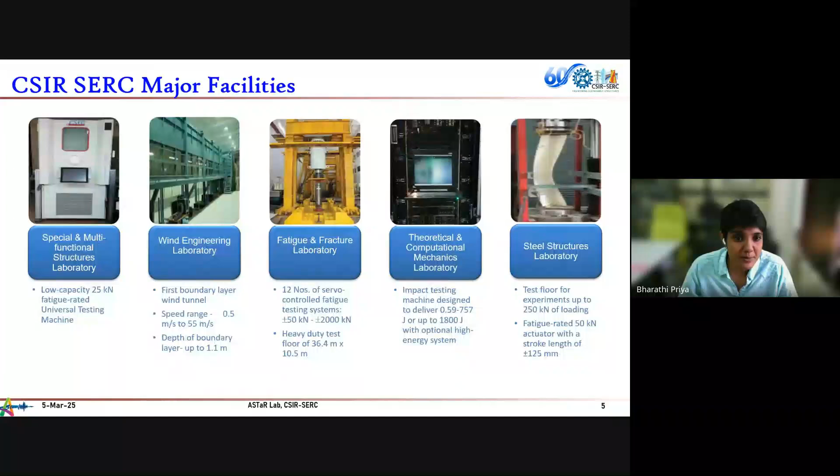We have 10 laboratories with us, including the one where I'm working, the Advanced Seismic Testing and Research Lab. This is a brief about our institute, which I'm sure many of you are aware of, and this is our laboratory, the Advanced Seismic Testing and Research Lab.

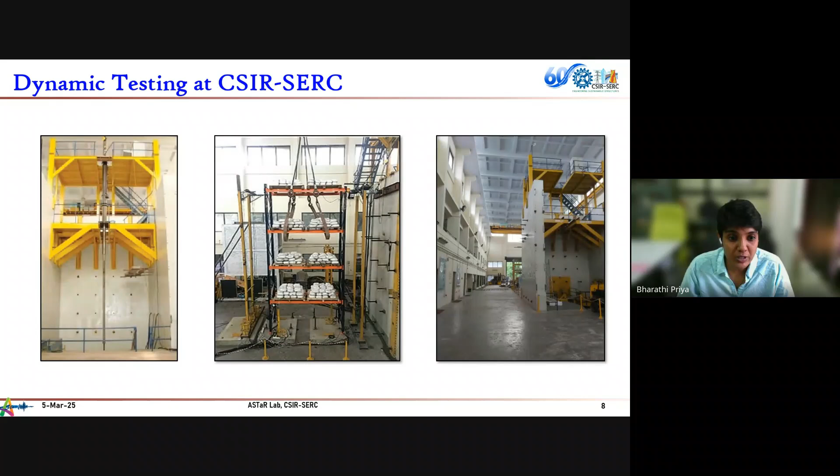We have sophisticated state-of-the-art testing systems, mainly consisting of shake tables and a pseudodynamic testing system. I believe Dr. Mohit, who gave a lecture yesterday, would have given a brief about all these things, so I'm skipping most of this part. Most of the dynamic testing we do consists of full-scale testing, and some unique structures, not necessarily buildings, which Dr. Mohit touched upon. So let us dive into the topic, which is vibrations, specifically seismic vibrations.

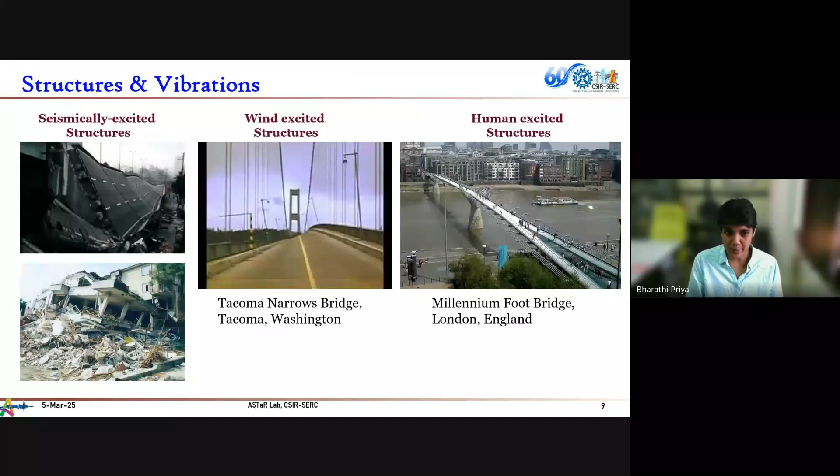The picture tells a lot about what happens to structures when subjected to vibration. There are seismically excited structures due to which the structure collapses, and there are also classical examples of wind-excited structures, which causes some sort of disturbance to the structure.

There's also a very interesting case study, the Millennium Footbridge in London. When it was opened, lakhs of people walked onto it, and the vibrations from people walking caused the bridge to vibrate. This was not anticipated during design. This is one of the very peculiar cases of what happens to buildings when subjected to vibration.

So the vibration could be anything - wind, earthquake, or something bizarre like human-excited structures. But our main goal as structural engineers is to ensure that whatever be the vibration source, the structure remains safe. Nothing should happen to the structure; it has to withstand whatever excess vibration it suffers, more than the anticipated one.

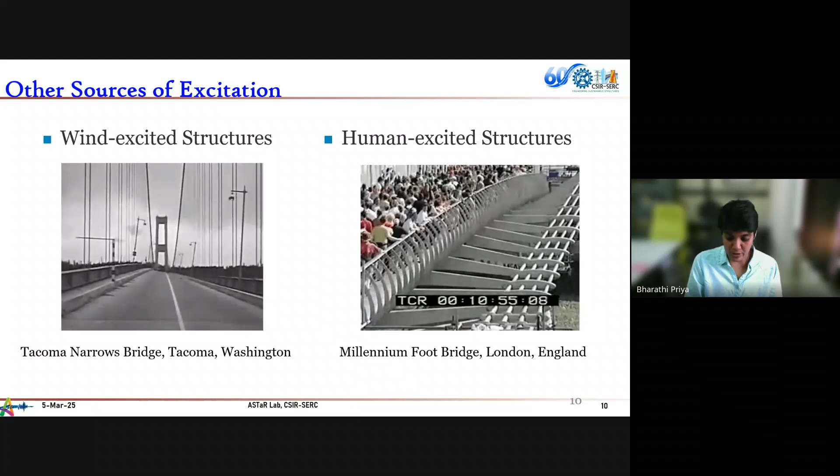That is the philosophy we expect for designing structures for earthquakes also. So what happens during an earthquake? One important distinction is there is ground acceleration acting onto the structure. The ground is moving, and because of that there are forces acting onto the structure. Why? We go back to basics, which is Newton's second law - a building is nothing but a mass, and when it's subjected to acceleration, it results in some sort of force. But it is not that simple.

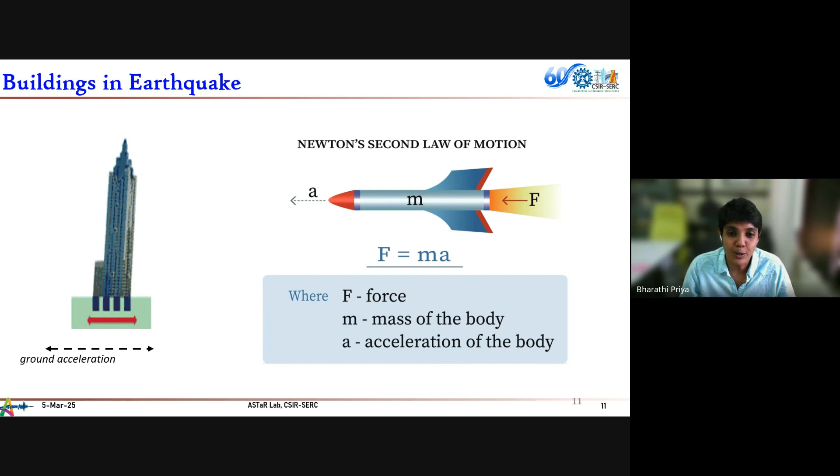But these forces happen. What happens to structures? We know that they collapse. That is one of the primary causes for concern for buildings. So we see collapsed buildings, roads, bridges, whatever be the structure, and it in turn kills people.

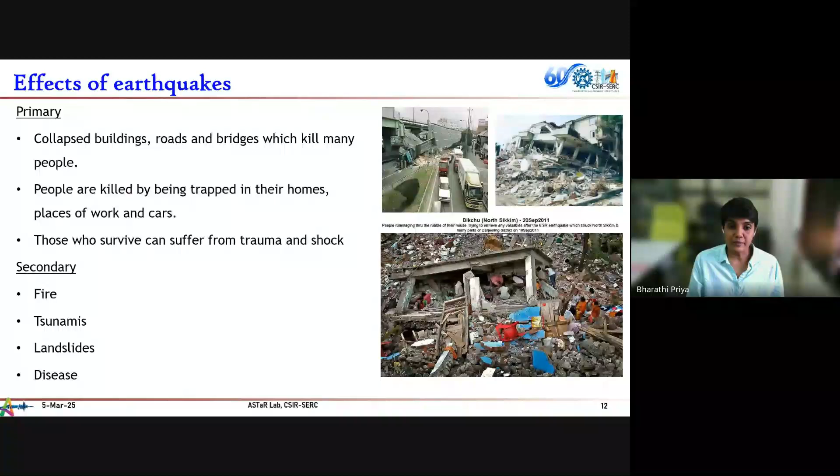There is a famous saying among seismic engineers that it's not the earthquake that kills people, it's actually the buildings that fall on people that kill them. So that is one of the primary effects of earthquake. But now as structural engineers, we are not looking only at the primary effect. We expand our area of interest to see what are the secondary effects and the long-term effects that can cause devastation after an earthquake. So this also falls on us.

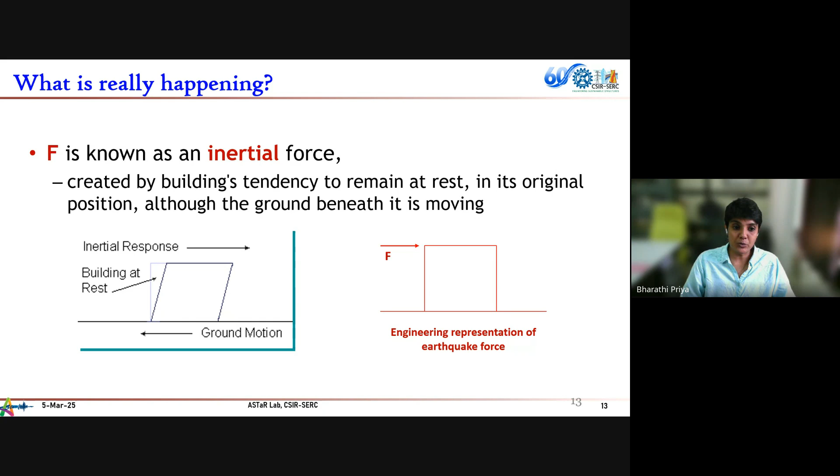As I said, there is an inertial force acting, and when a building is at rest, it is subjected to acceleration, which is a lateral force coming onto the structure. For engineering representation, we take it as a lateral force acting onto the structure. This is a simplified example of a single frame subjected to ground motion, and how the force will be represented when designing the structure.

But why does the structure move? Again, we go back to the basics, and most of the reason it fails or moves is because of resonance. All of us know what resonance is, and when the resonance of the ground motion matches with the resonance of the building or some parts of the building, there is going to be an amplified response, and because of that, the building is going to fail. So this is the basis behind it.

There is a very famous example of this, the Mexico City earthquake, which happened in 1985. What happened there is most of the shorter structures sustained the earthquake, and most of the taller structures failed. This was a beautiful example of how resonance affects seismic excitation.

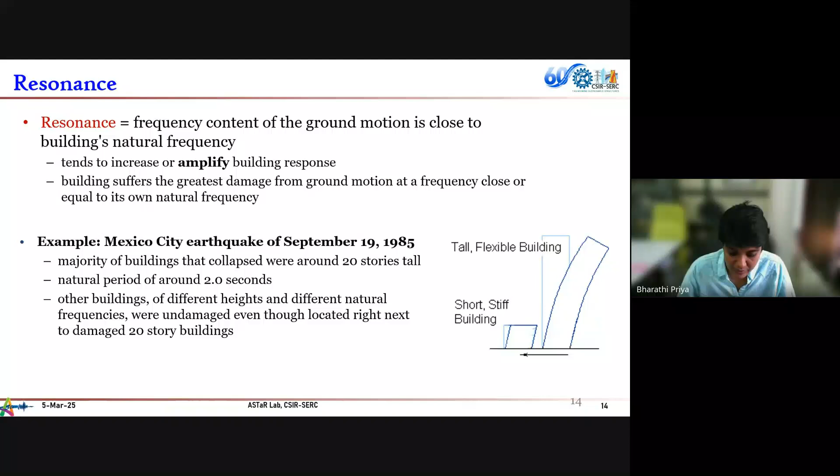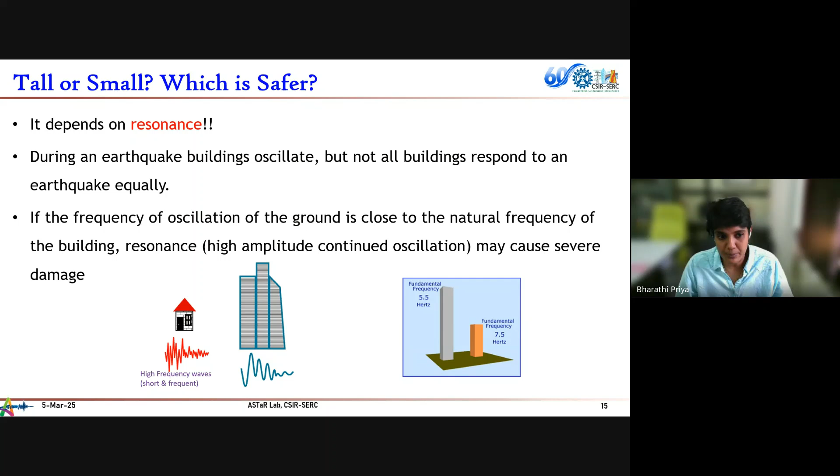The Mexico City earthquake was famous for being a low frequency earthquake, and because of that, most buildings around 20 stories tall, having a natural period of around 2 seconds, failed. Other buildings of different heights remained undamaged. So as I said, resonance plays a major role in it. If you see typical examples of how tall a building is and how much resonance affects each building, the taller it gets, the more flexible it becomes. That is the idea behind it.

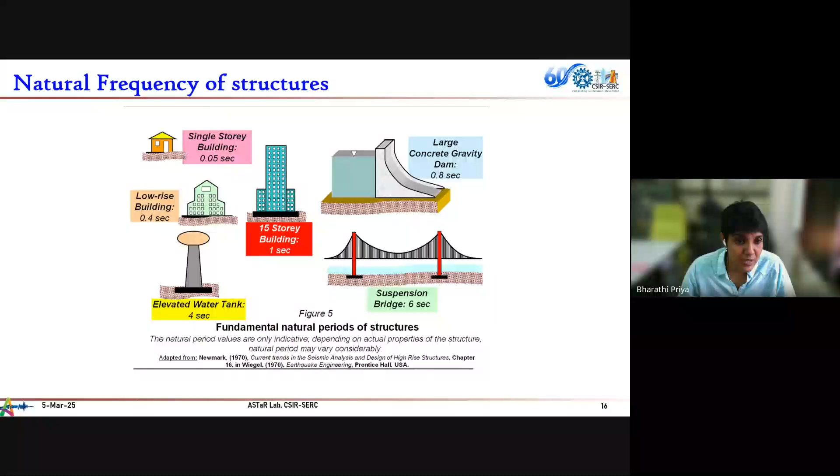So it's not just buildings anymore. We have to look at different kinds of structures. As structural engineers, we have to deal with different kinds of structures against earthquake, like suspension bridges, elevated water tanks, dams, each having different natural frequency, different time period, and they behave differently for the same earthquake or for different earthquakes.

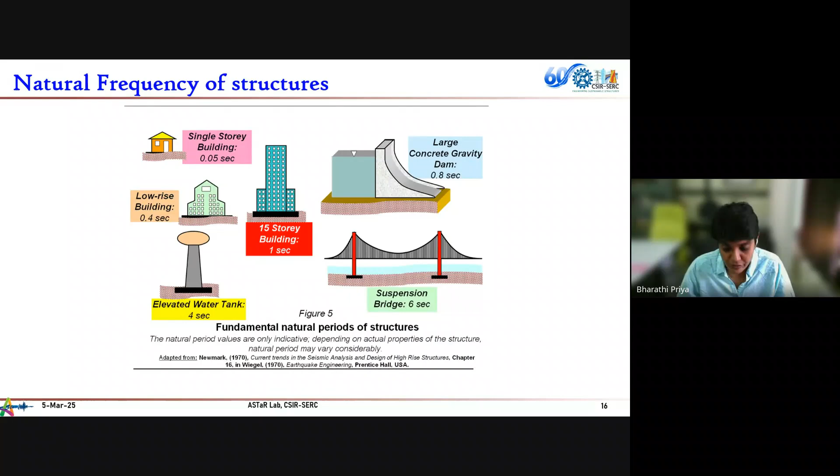Now let us see how we are classifying earthquakes for design consideration. We know that we take the design basis earthquake, which is reasonably expected to occur in the lifespan of the structure. Then there is a maximum considered earthquake, which is the most severe earthquake. What we expect is for the structure to behave in a ductile manner so that it doesn't experience a brittle collapse or a sudden collapse for whatever earthquake may come.

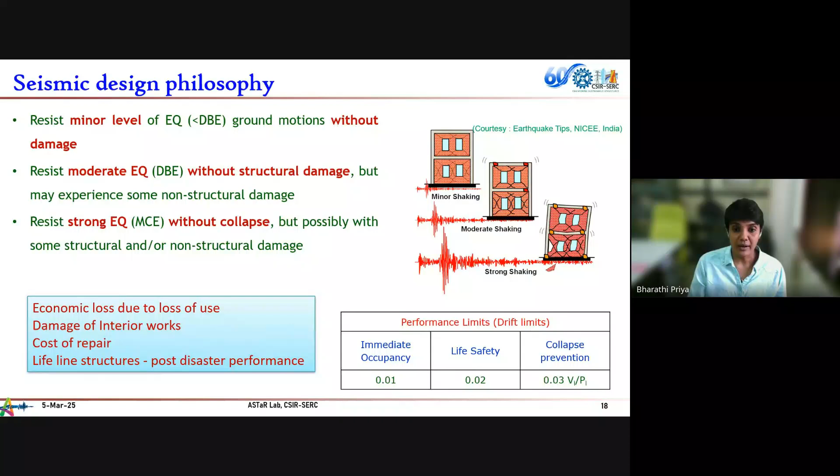That is the performance expected for the structure. For any normal residential structure, it has to withstand minor shaking without any damage. For moderate shaking, it should not have any structural damage, only repairable damage. And to resist a strong earthquake, it should not collapse. There can be some damages and some non-structural damages, but it should not collapse. So this is the performance that we expect out of a building for the different earthquakes I was talking about.

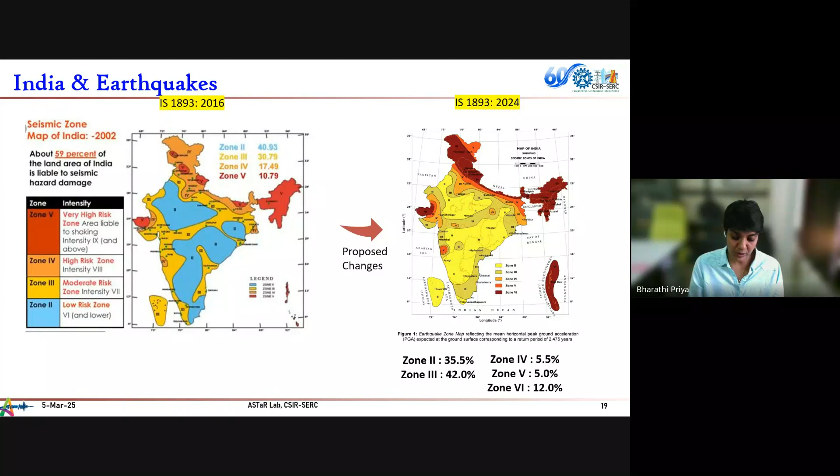Most of the structures which are already designed might not cater to the criteria that we are revising right now. Let us see some of the most common used seismic analysis methods.

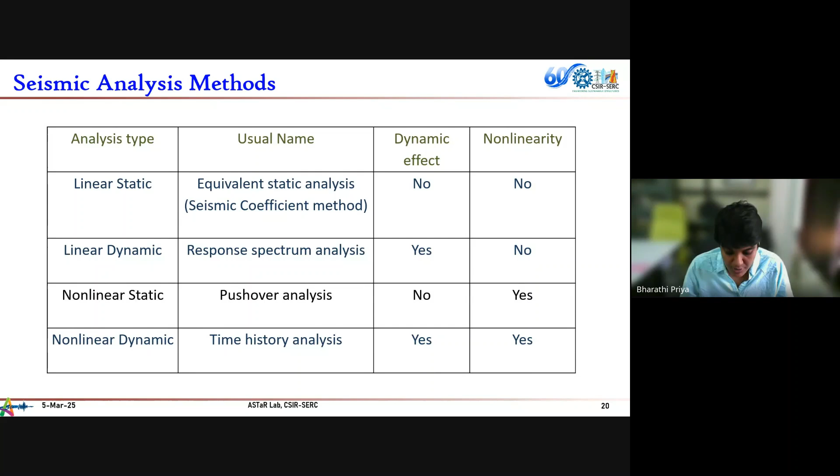There is linear static, linear dynamic, non-linear static, and non-linear dynamic. Most of the time we revolve around linear dynamic, where you take the dynamic effect of the structure but don't consider the non-linearity that much. But structural control techniques primarily revolve around the non-linear dynamic method, mostly consisting of time history analysis, where you take the dynamic effect of the structure as well as its non-linearity and the devices added to it into consideration. This is the most sophisticated design method we can enter into.

But why do we need these sophisticated design methods? We are talking about structures with increased flexibility. We want taller, more sleek structures. We want a higher safety level for the structure, and we also want to reduce building utilization materials, moving towards sustainable materials.

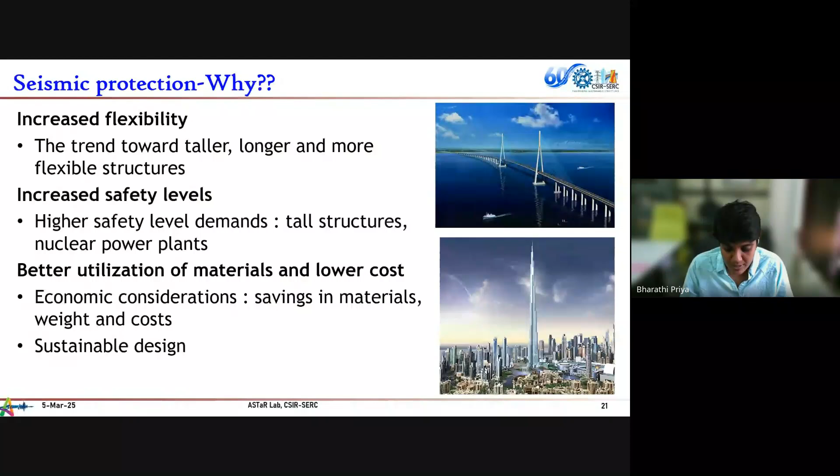So we have an open question: can we make a structure really earthquake proof? Whatever it is, DBE or MCE, can the structure withstand that? Theoretically, to make a structure earthquake proof, it has to be smart, with different control techniques for different kinds of earthquake vibration. All these things should be there in a single structure to make it earthquake proof.

It has to resist fire, and because of the post-earthquake scenario I was talking about, all these things should be in place for a structure to be called earthquake-proof. That is why, in reality, it is very difficult or nearly impossible to build something earthquake-proof. But we can make it earthquake-resistant to some extent. There is a major difference between the two.

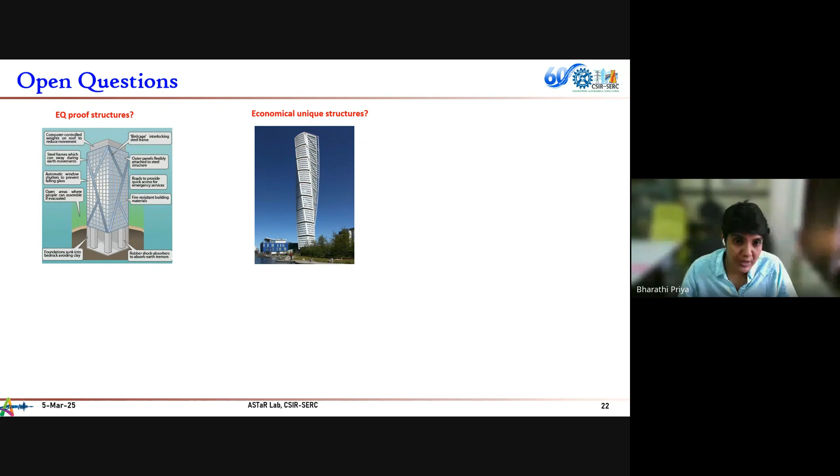We also want a unique structure that has to be economical. And since we're talking about seismic forces, we cannot turn a blind eye to other forces coming onto the structure. Take blast, for example, which is also a dynamic load—you see the difference in structural behavior, in the loading behavior, between blast loading and earthquake time history. These are two contrary requirements we are putting onto the same structure: it has to withstand both blast and earthquake.

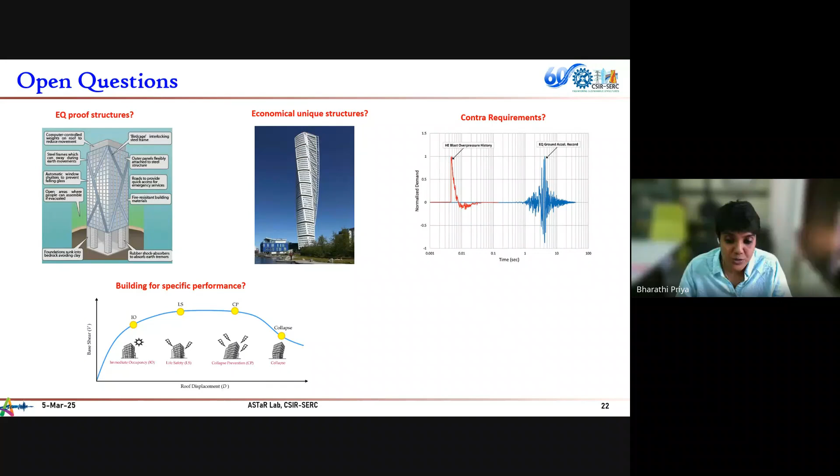Now we are looking into a specific performance level for a structure. The performance tells you whether your structure needs a life safety design, a collapse prevention design, or an immediate occupancy design—how stringent it has to be depending on the type of structure.

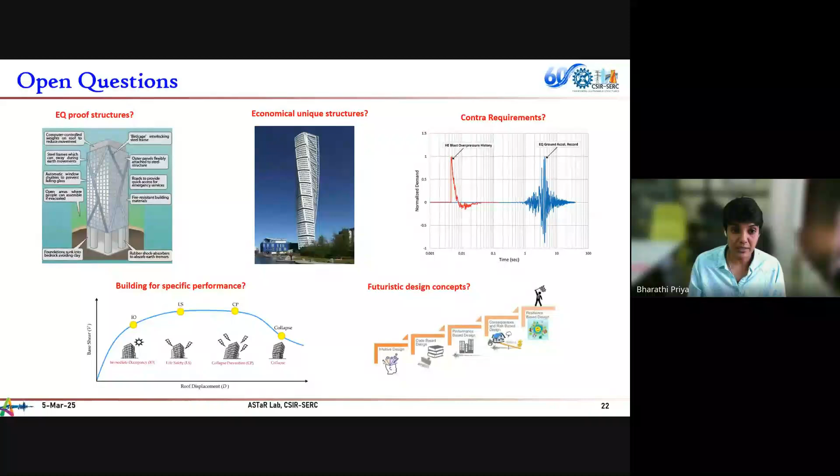We are moving into the resilience-based design concept, where it's not just about the structure anymore—it's about the whole community level, how it performs and how it bounces back after a natural disaster like an earthquake. When we talk about resilience-based design in a seismic scenario, it includes technical, organizational, economic, and social aspects.

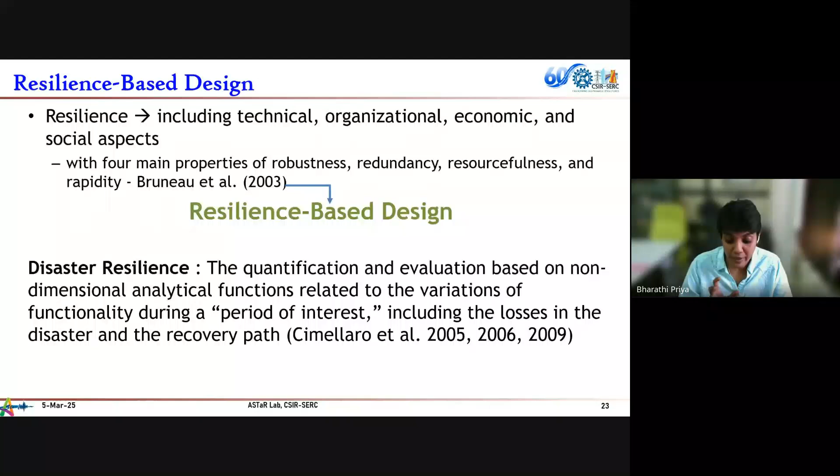What are the primary effects? What are the secondary effects? How do we quantify it, and what measures do we use to quantify resilience-based design? And if we're talking about disaster resilience, what should be the period of interest—how much recovery time should be allowed for the structure? All these things come into play.

So whatever parameters we talked about earlier get modified for the resilience performance level—from a 2D concept, it becomes 3D. We want functionality, recovery time, and intensity measures it has to withstand. We divide the performance level based on this: starting from safe and operational, to safe but repairable, to safe but usable. These multi-criteria come into picture when designing for resilience.

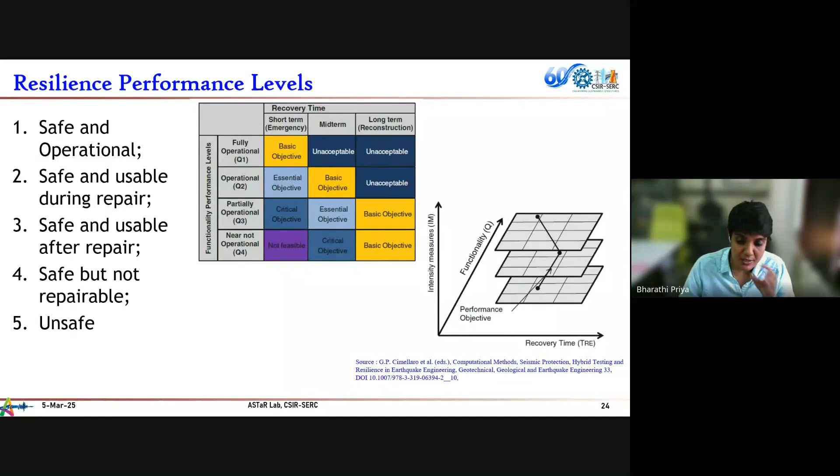If these stringent requirements come into play, can we rely on traditional methods to satisfy all these needs? This is the question a seismic engineer faces. Traditional-based design, which is basically strength or ductility based, may be possible most of the time, but it's highly uneconomical for these stringent requirements. That's when we go for response control based methods, where basically we are looking for two or three functionalities.

You either minimize the structural damage and control the response, or modify the interaction between the structure and ground during an earthquake, isolate it in some other way, push the natural frequencies away using some method, and make it efficient. All these can be done by adding a stiffness based device, a damping based device, or adding flexibility through an isolation device. These are secondary devices added to the structure.

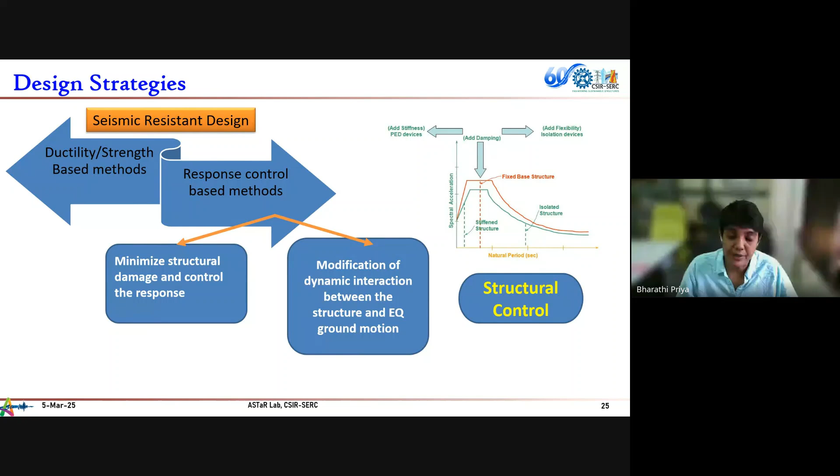So if you look at the spectral acceleration curve, you can push it left or right, or down or up, depending on the requirement for the performance level, or even the resilience-based performance level.

So a building structure is not anymore just the structure. It has a primary structure, primarily designed to take care of gravity loads, and then seismic members additionally added to absorb the extra energy. So what happens during an earthquake? How do they divide themselves to take care of the energy dissipation?

In small and medium earthquakes, a conventional structure mostly remains elastic. But when the earthquake is large, you want it to be inelastic, and push it based on the ductility of the structure. You make the structure safe, dissipate the energy, allow some damage, and keep the structure safe.

Whereas if you're talking about this damage control strategy, you want the structure to remain elastic no matter what earthquake comes. The primary structure will remain elastic, whereas the inelasticity, the energy dissipation, comes from the secondary device added to the structure.

Depending on whether it's a small or medium earthquake, the secondary device has to dissipate the energy accordingly. If it's a large earthquake requiring more inelastic response, the secondary device can sometimes fail and dissipate the energy, but you can replace it and keep the primary structure safe because it remains in the elastic range. This is the design principle we work around for the response control based method.

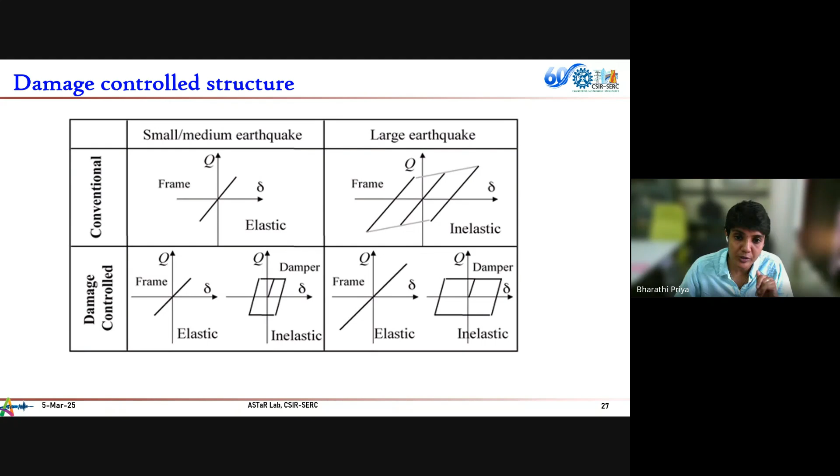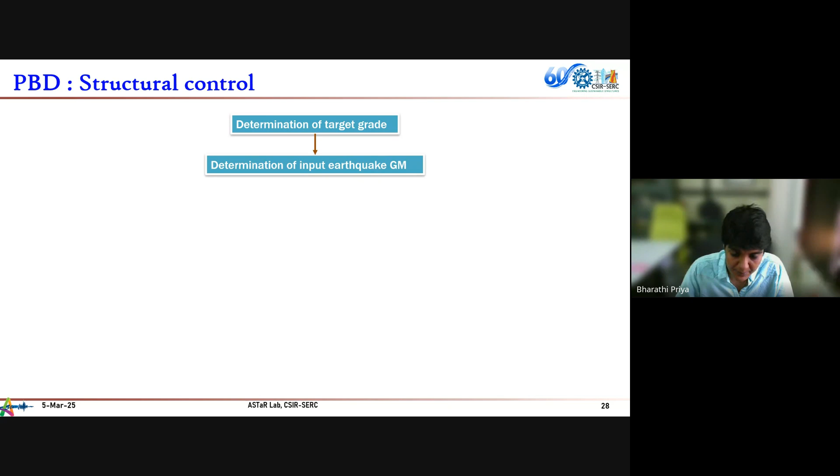This comes majorly under a design method called performance based design. For structural control, you determine the target grade of your structure, the level of performance expected, and the input earthquake ground motion based on codal provisions, or site specific spectra for important structures. Then you design the performance criteria corresponding to the target grade by modifying the structural design with a structural control technique.

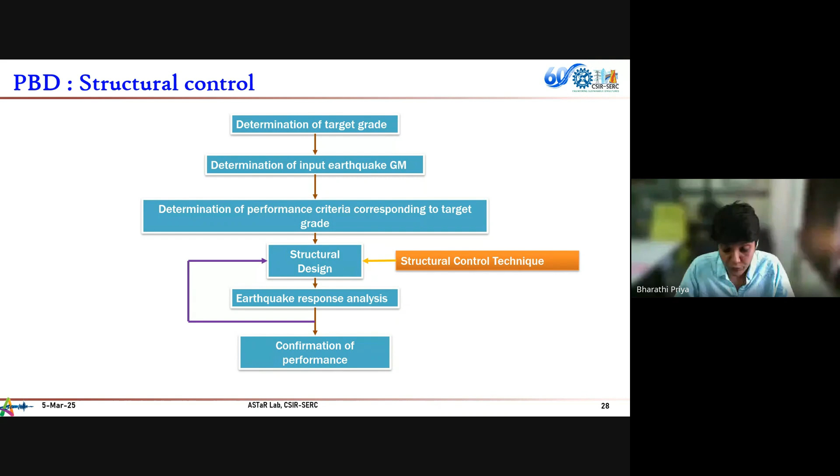Then you do the nonlinear time history earthquake response analysis to find out whether your response conforms to the performance limit you have set. If it does not, you go back and modify the structural control parameter, and iterate until your structure meets the required performance. This is the design method we follow for the structural control based technique.

So how do we do that? We need to use something like a smart material, so the structure becomes a smart structure. It senses any changes in the environment of the system, so it should have sensors. It should diagnose the problem at critical locations, and then store and process the measured data, so it should have something like a control computer.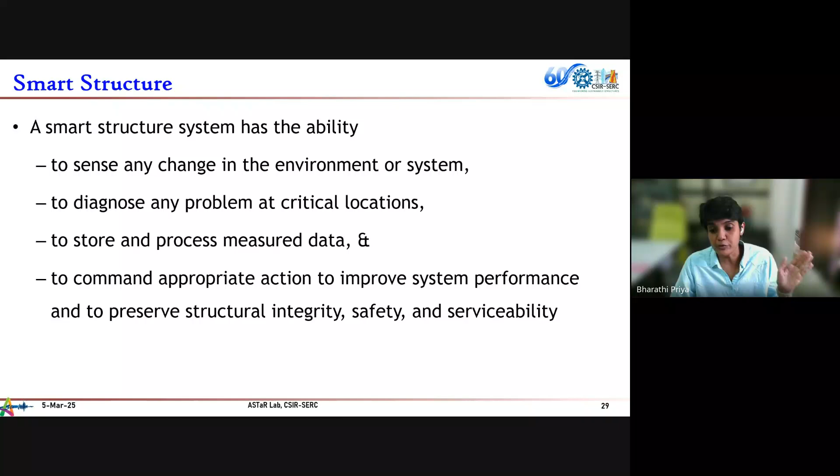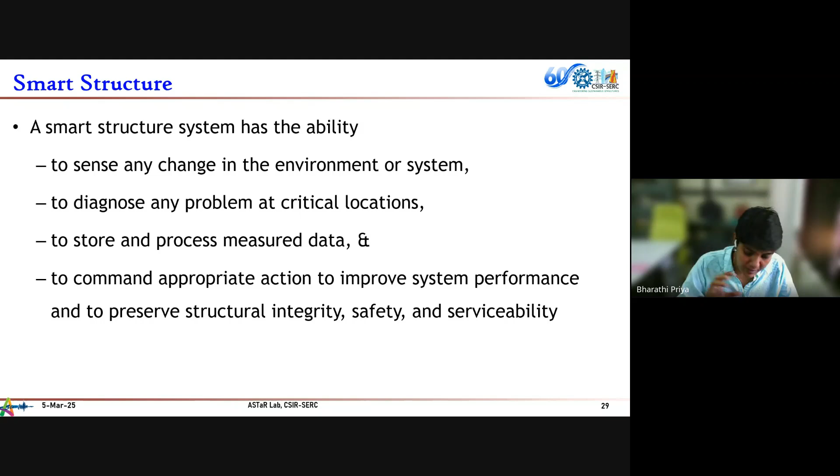The computer checks whether the performance is exceeding limits or within limit. If the performance is exceeding, it should give a control command action to bring the structure back to its intended performance, say for preserving integrity or serviceability limits like immediate occupancy. So it should bring the structure back through some kind of control action.

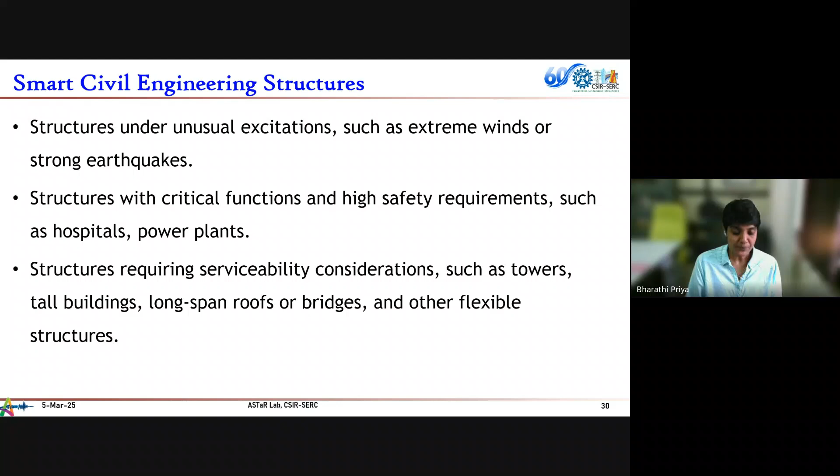For civil engineering structures, the load you're considering is usually very extreme - there is extreme wind, strong earthquake, and we want very high performance safety levels from the structure, especially structures like hospitals and power plants. We also have all sorts of unique structures - everything is big, everything is unique. That is why it is more challenging to adapt smart principles for civil engineering structures.

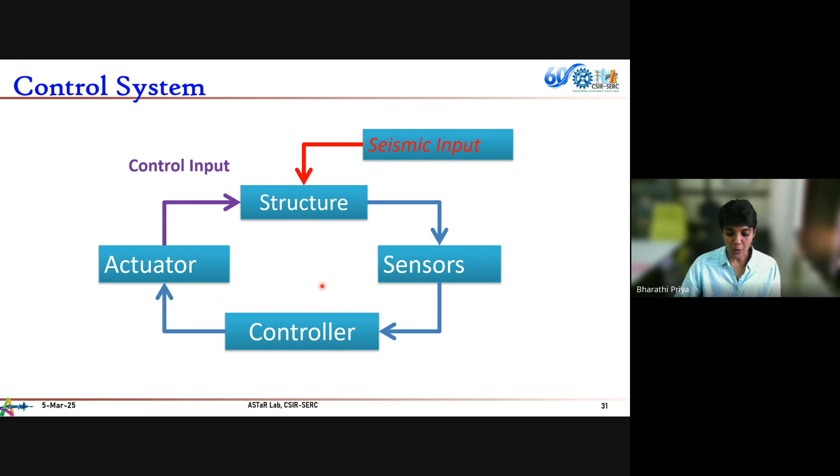So how do we do that? We use several methods. We classify structural control techniques majorly into 4 categories: active system, hybrid system, passive system, and semi-active system.

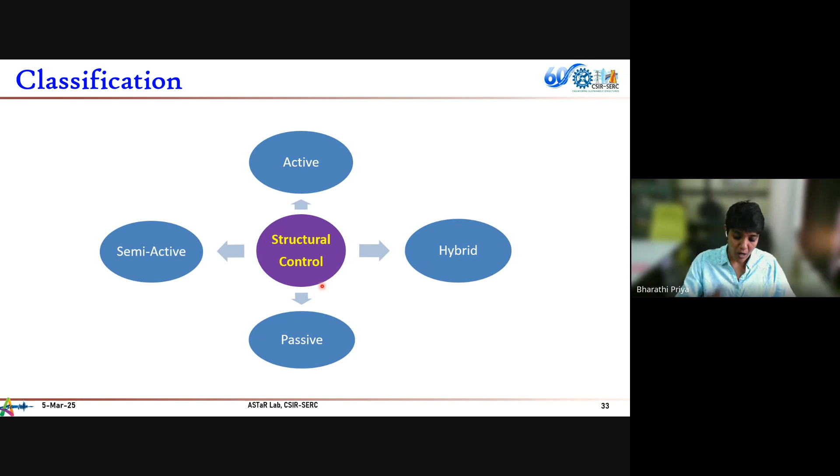I think many of you are aware how these systems work, so I'll briefly touch upon this and rush through it. In a passive control system, the major thing is the passive device does not require any energy to operate. They are mainly made up of metals which can yield and dissipate energy. Architecture-wise, you'll have the structure and the control actuator. You won't need a sensor or a control computer, because these passive devices, once designed and added to the structure, cannot be modified. So it's just the plant structure and the control actuator in play.

Because of that, they are very, very energy efficient, and they impart forces that depend on how the structure performs or how the secondary devices perform. They do not require an energy source, which comes very handy during an earthquake.

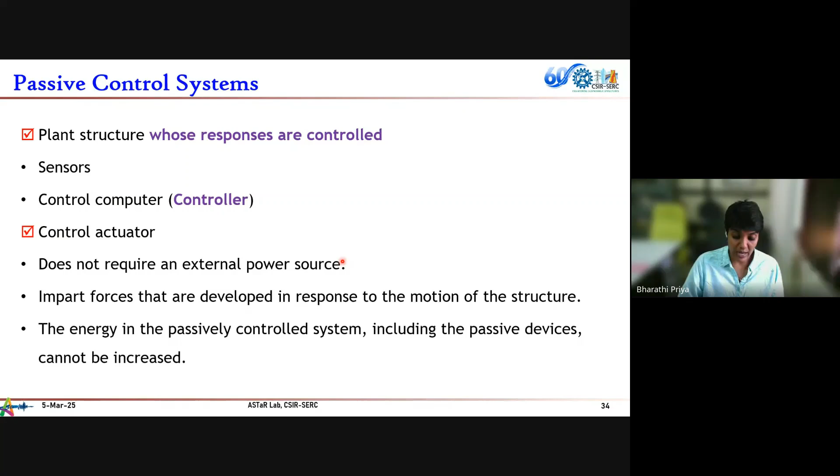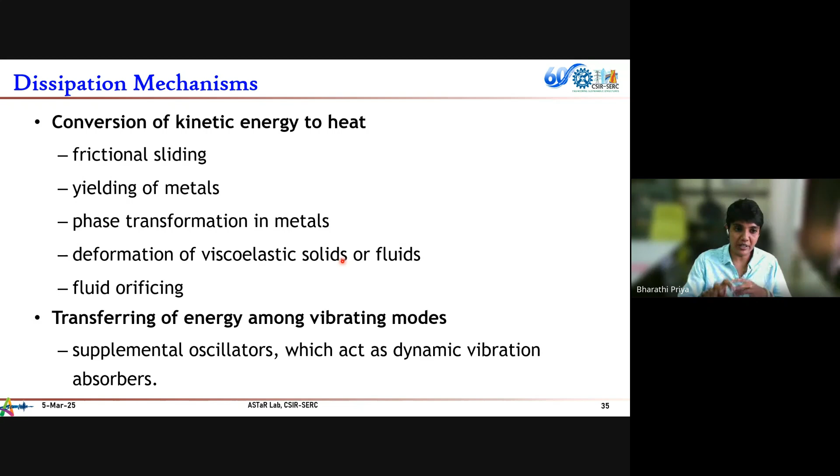So what is the principle that they use? Mostly, as I said, it is energy conversion - it could be frictional devices, it could be yielding of metals, it could be phase transformation of metals. These are the principles used for dissipating energy. From one mode to another, they dissipate energy either by deformation or by phase transformation, depending on the material the device is made of.

Some classical examples of passive devices: the first is a passive damper made of metal, then base isolation, which all of us know, and something like a tuned mass damper, primarily used for wind applications. So this is the energy dissipation principle for passive devices.

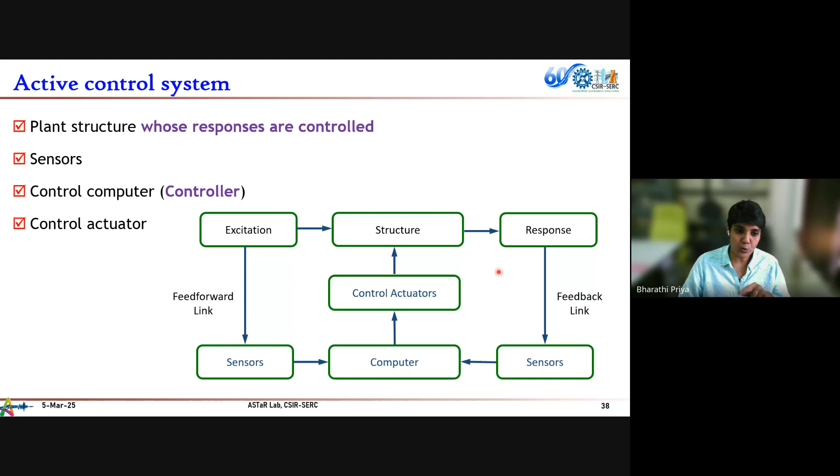The straight opposite to that is a more sophisticated system, the active control device. In an active control device, you have everything - structure, sensors, control computer, and actuator. Every action depends on how much is needed and how fast it is needed. All this happens in a closed loop control system. The advantage is it's very, very efficient - it works wonderfully because you give only as much as is needed.

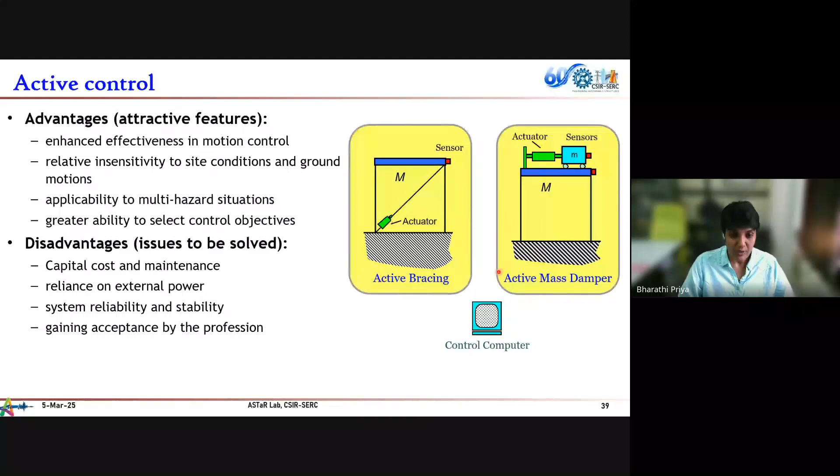But one of the major disadvantages of this active control system is they are very sophisticated instruments. They need external energy to operate during an earthquake, which sometimes proves challenging. However, there are some active devices - I think Mohit would have told about this yesterday, so let me not go into the details.

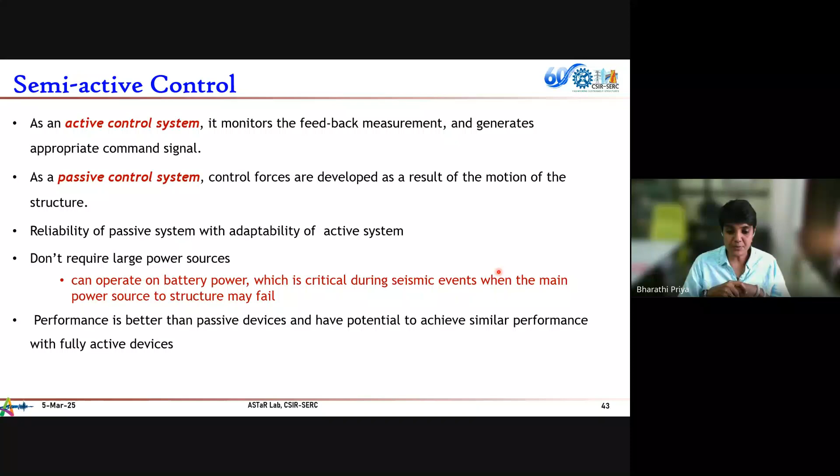Then we go into the semi-active control mode. Semi-active control takes the advantages of both active and passive systems, forming a bridge in between. Here also you use the device only when required, and only as much as required, depending on the need. But the devices are made up of smart materials which do not need high energy. They work like a passive system where you can actuate it just using a battery sometimes, which comes handy during an earthquake. But like an active control system, they work based on how much is required - they are response control based, so they are very, very efficient. These are called adaptive devices.

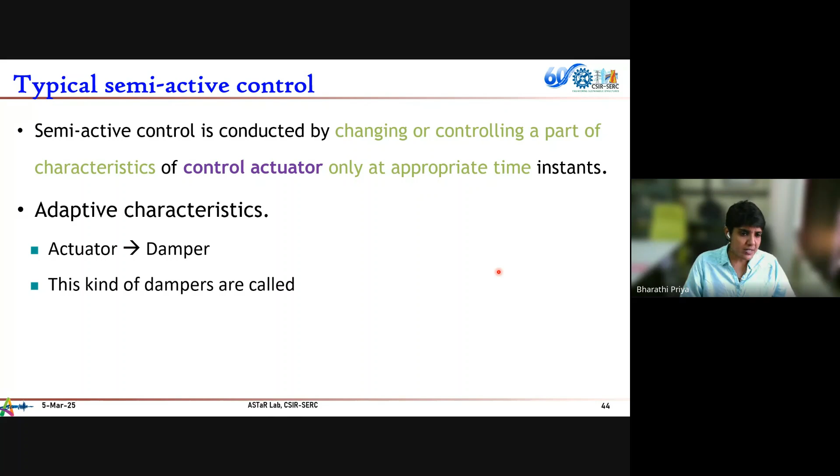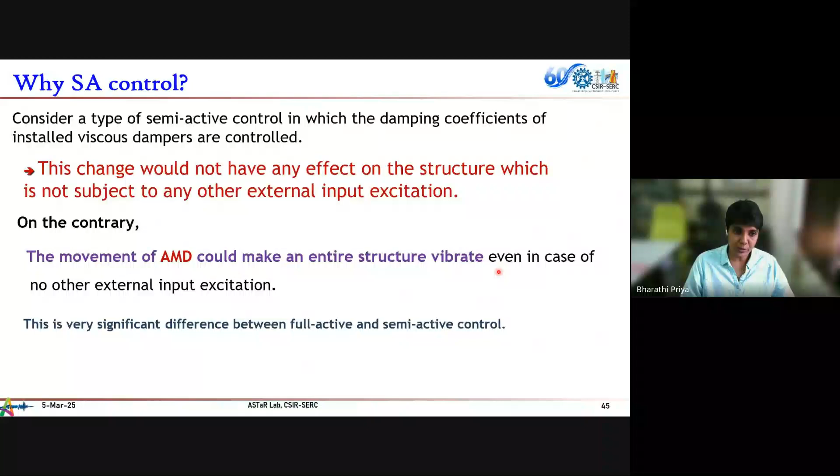These devices can be dampers. Most of the time, these actuators are called dampers in common name. One of the dampers we are going to talk about today is the magnetorheological damper, which is called a controllable damper. On the outlook, a controllable damper looks exactly similar to an active system, but the difference is the damper or isolator used will be adaptive in nature. That is the difference between an active and a semi-active control system.

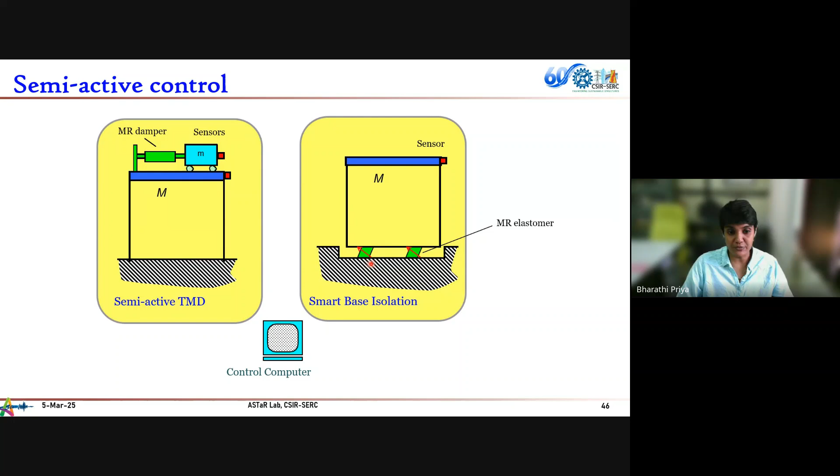So if I tell you a smart material is needed for this, what are smart materials? A smart material is nothing but something that can change between two engineering fields, or phases. For example, we can divide engineering into electrical, thermal, magnetic, and mechanical action. There are a lot of engineering fields we talk about. If a material operates in more than two engineering fields, we can safely call it a smart material.

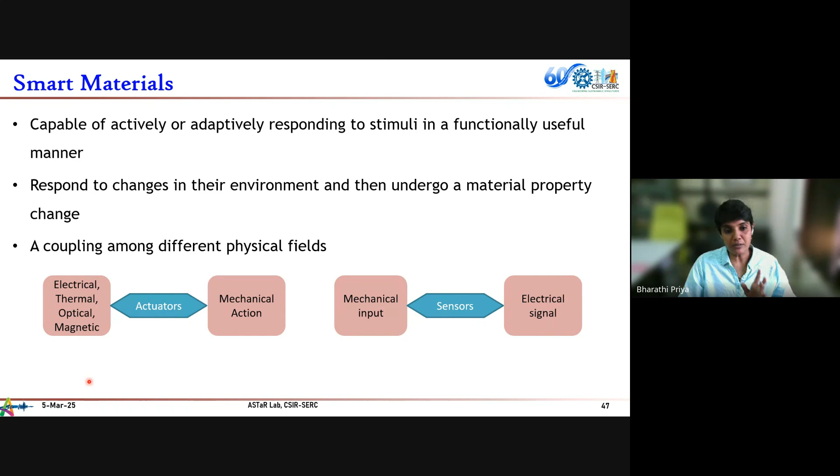Smart materials are primarily used as actuators as well as sensors. As an actuator, it takes a signal from one physical field, like electrical, thermal, optical, or magnetic, and converts it into a mechanical action. The reverse, where a mechanical action is sensed and gives a voltage or electrical signal out, is termed a sensor. So a smart material is used both as actuators and sensors.

One commonly used smart material is the piezoelectric smart material, PZT, which can be used both as a sensor and an actuator. As a sensor, some mechanical action happens, and because of it, there is a voltage that comes out, telling us the relative voltage difference due to this mechanical action. With the inverse piezoelectric effect, the voltage or current passed through the piezoelectric sensor causes a mechanical action. That mechanical action can be used to control and provide a reverse force that brings the structure back to equilibrium. These control forces can be used from the actuation principle of PZT actuators.

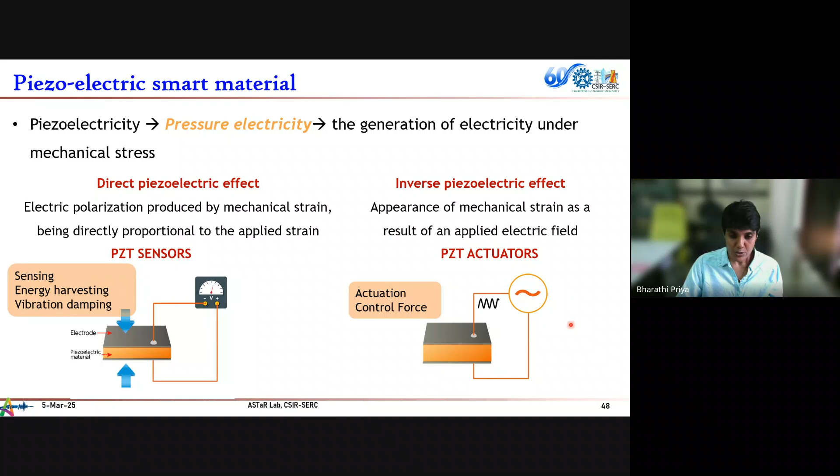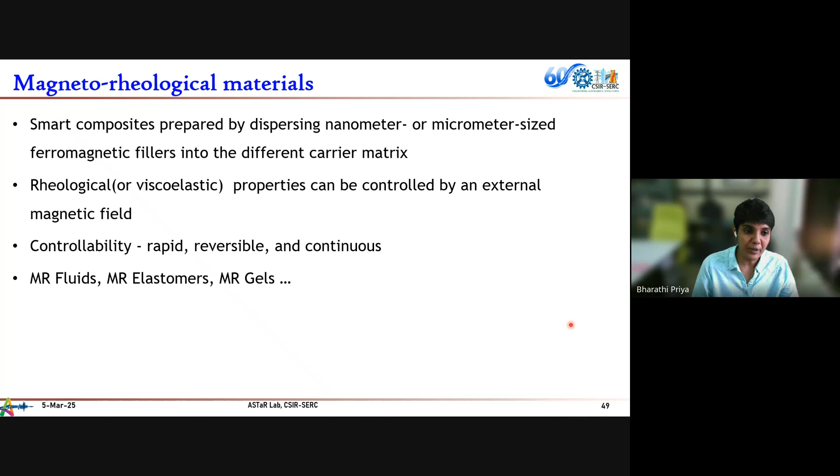Let us see what magnetorheological devices do. Magnetorheological is another smart device, typically available in the form of MR fluids, MR elastomers, and MR gels. In an MR fluid, there is a suspension medium which is fluidic in nature, usually something like oil, in which magnetic particles, the carbonyl iron particles, are suspended. When an external magnetic field acts on this fluid, the ions inside reorient themselves and affect the viscosity of the liquid in which they are dispersed.

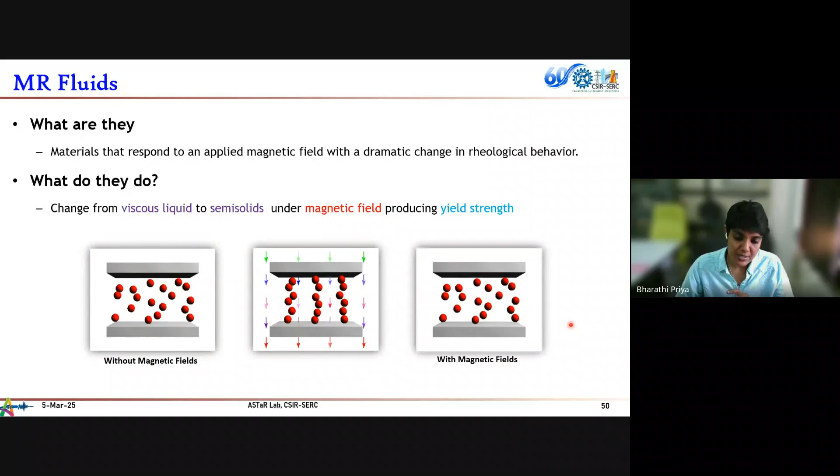When a magnetic field is given, depending on its intensity, ion reorientation happens, changing the viscosity of the fluid, maybe from a semi-viscous to a semi-solid state. Because of this, the yield strength of the fluid changes. This is what happens at the material level. When you use this material in a device, say a damper, this is what causes the change in the damping property of the device.

Depending on the operating mode, there are various devices that use this MR fluid, with three operational modes. In MR dampers, when a magnetic field is given, the yield stress of the liquid changes, which changes the viscosity of the fluid, and that changes the damping characteristics of these dampers or shock absorbers. An MR damper looks something similar to a shock absorber you see in bikes. One of the biggest advantages of MR dampers is that they are very stable and very fast in responding to external stimuli.

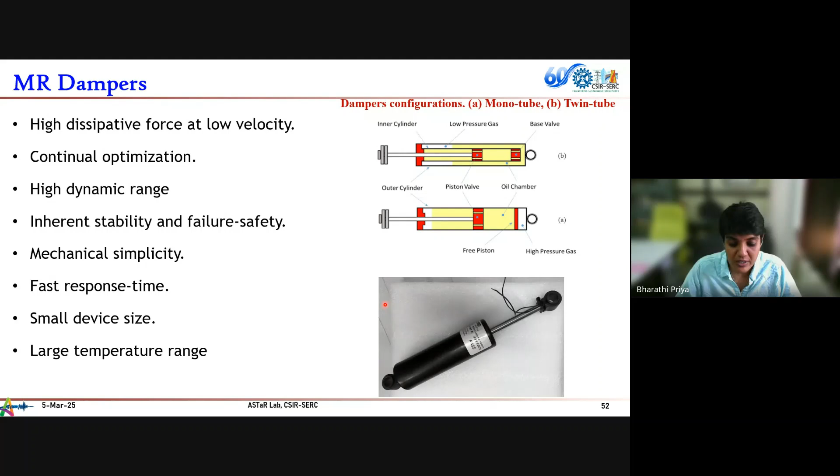So they are very, very quick response devices, which comes handy during seismic control.

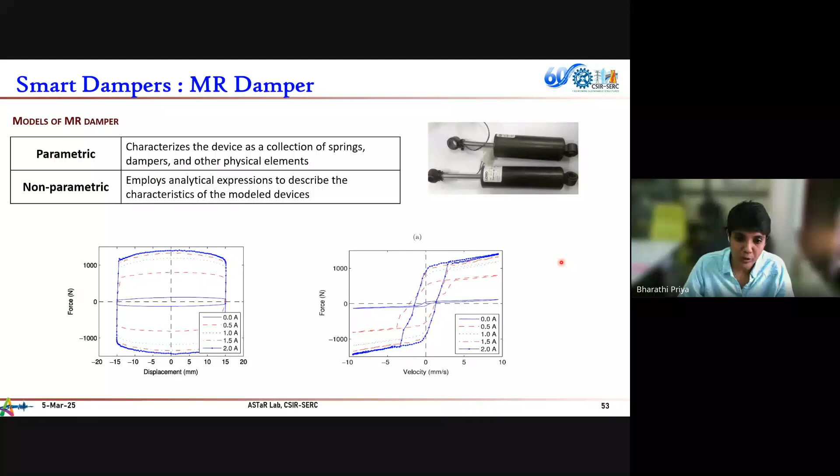When the velocity increases, force also increases. That doesn't happen here. So first, if you have to use these devices in a structure, you need to characterize them. What do you mean by characterization? You need to find out what happens when you give certain frequency, certain input parameters to the structure, and find out what force is getting developed because of it.

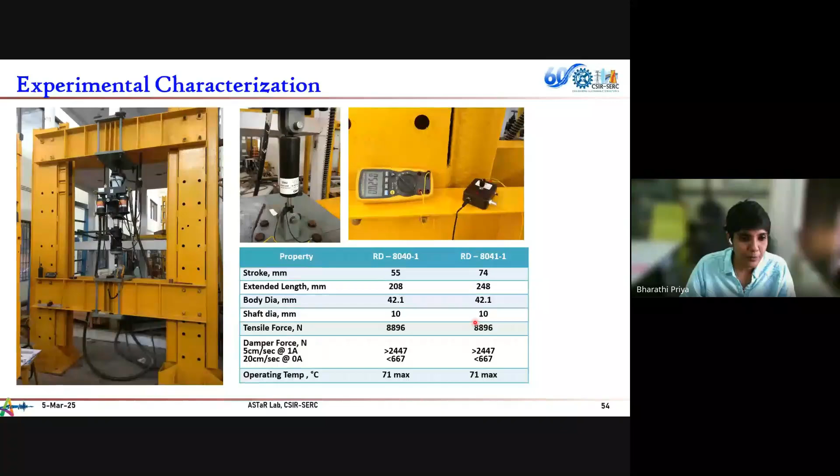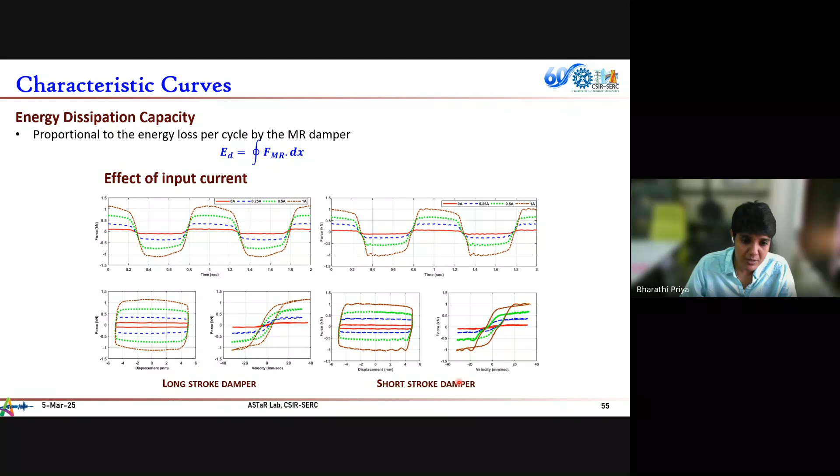There are two kinds of dampers existing in the market. When we started this study, we didn't concentrate on developing a damper. We wanted to see, if a market-existing damper is there, how can we straight away use it for structural control. So we took two types of dampers that were commercially available, and subjected them to different kinds of dynamic excitation. Our aim was to see how the force response varies when input parameters vary, since the energy dissipation capacity was our interest. We studied it by giving different velocity, different current, and saw how the dampers behave. The only difference between both dampers is the stroke length; apart from that, the force capacity and everything else remains almost the same.

First, let us see one of the parameters, current, which changes the viscosity of the liquid. Of course, when the input current changes, you can see that the energy dissipation happens. As the current increases, the energy dissipation again increases nonlinearly, so it is not linear in nature. And depending on the stroke length of the damper and the input displacement, that also varies.

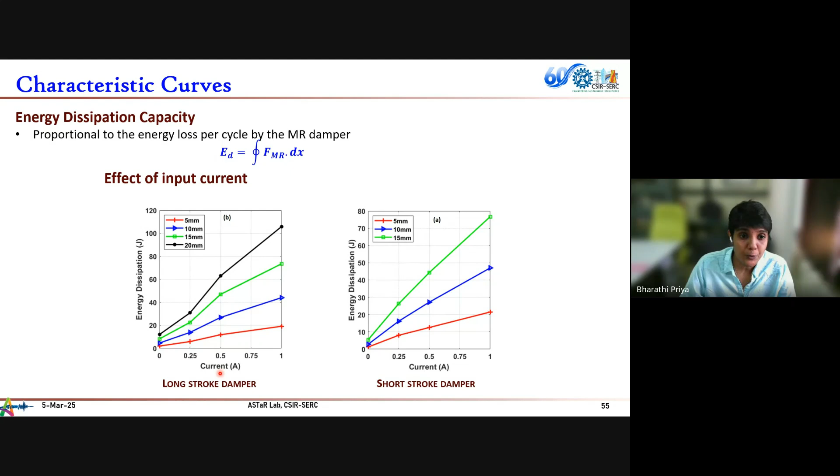Then the next thing was the frequency of operation. When we change the frequency and the amplitude, we can see that the response varies nonlinearly. This establishes that most of the input parameters - the current or magnetic field, amplitude of vibration, and frequency of vibration - all three are important in our dynamic excitation, and all three result in a nonlinear response from the damper.

So now we know that it is a nonlinear response. The next step is, how do I characterize it? Meaning, if I have a combination of frequency, damping, input excitation, and current, how much force is getting generated? This relationship should be established. This is called the dynamic characterization of the device. So that was done - how do we characterize it?

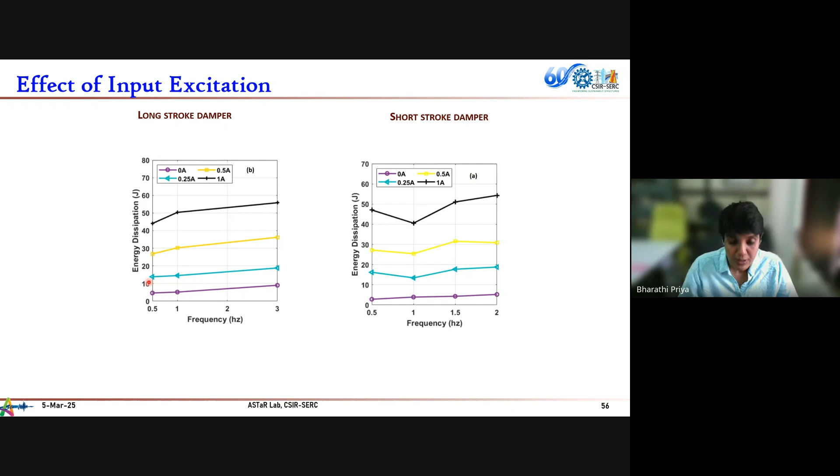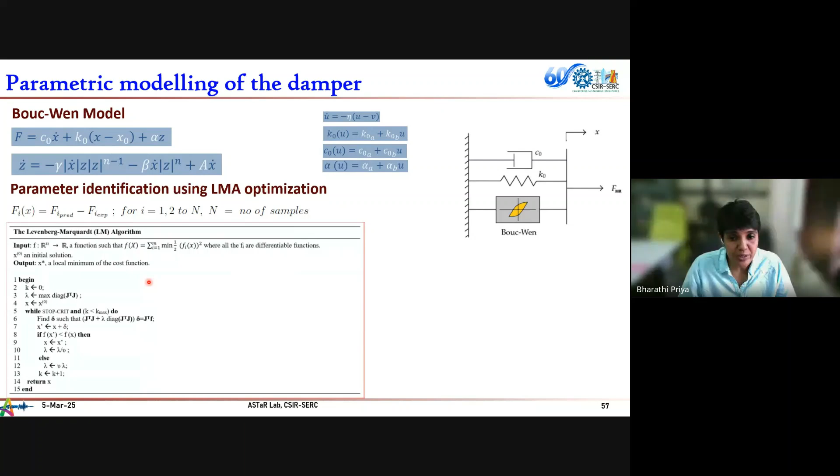This is nothing but another spring-mass-damper device. You can use parametric modeling techniques - there are various models available for modeling these kinds of dampers. We took one such model and tried to find out whether we can capture the force-velocity and force-displacement relationship. To some extent it was capturing the force-displacement, but not the force-velocity.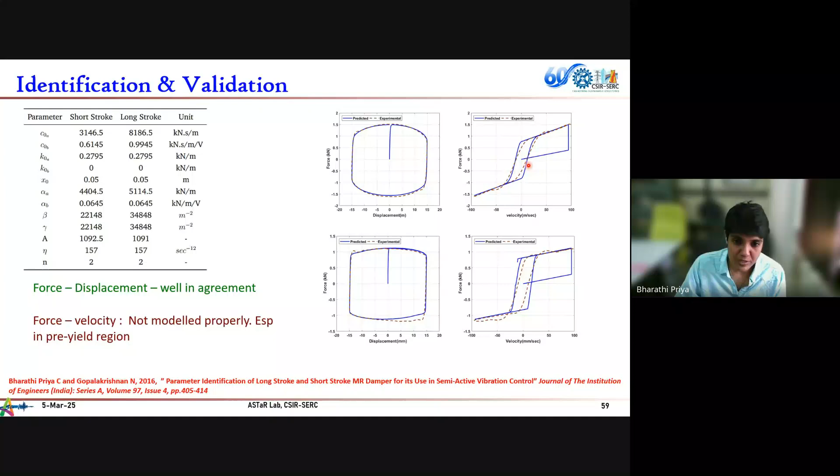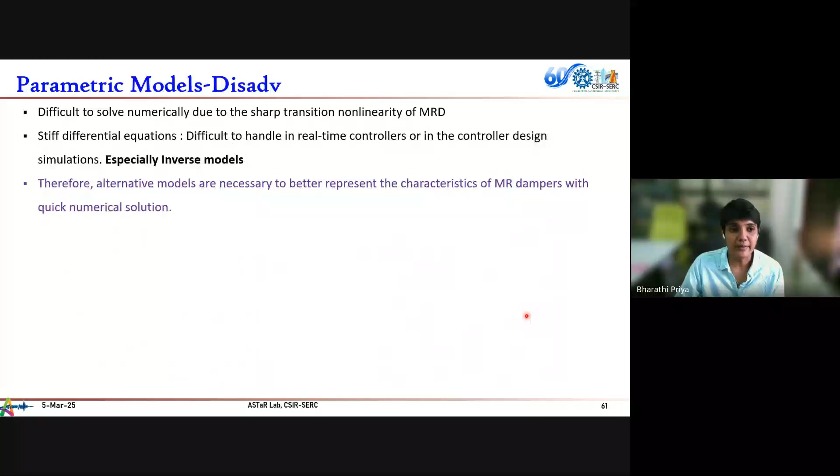So we resorted to some other simpler models. We wanted to see how best we can capture the force-velocity, because velocity is one of the important parameters to determine whether we can use a damper or not, and that is going to come in handy to choose a damper for our application. So we chose some simpler models, something like a lumped parameter model, to capture the velocity profile of the damper, and we were able to do it successfully.

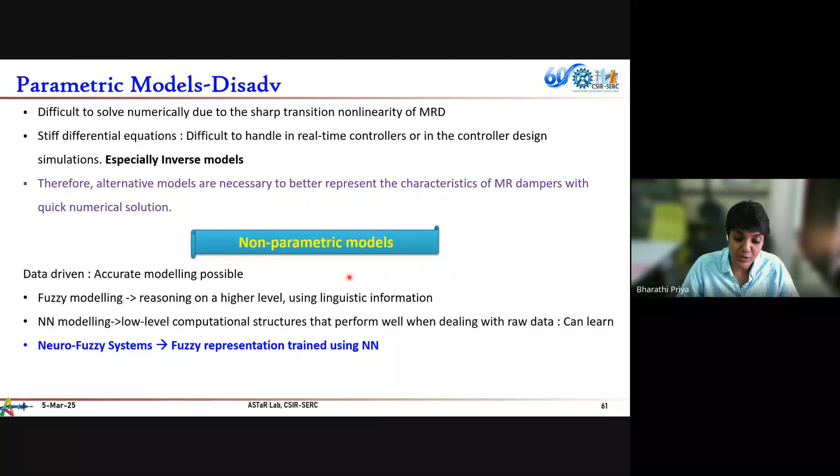And at that time, we had a lot of data. Why do we have to go for intrinsic equation-based models? Why can't we go for non-parametric models? Because we have data - we have data-driven models that are available. So we tried our hand at that also. We tried to model the damper with ANFIS modeling, which is something like a black box model anybody can do.

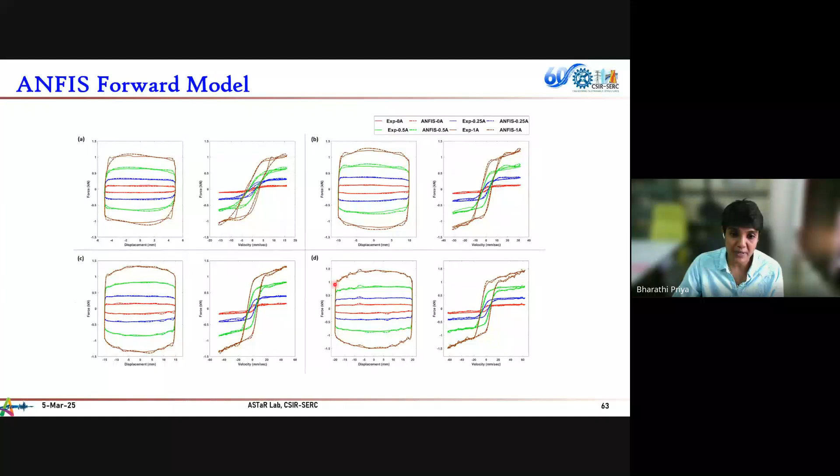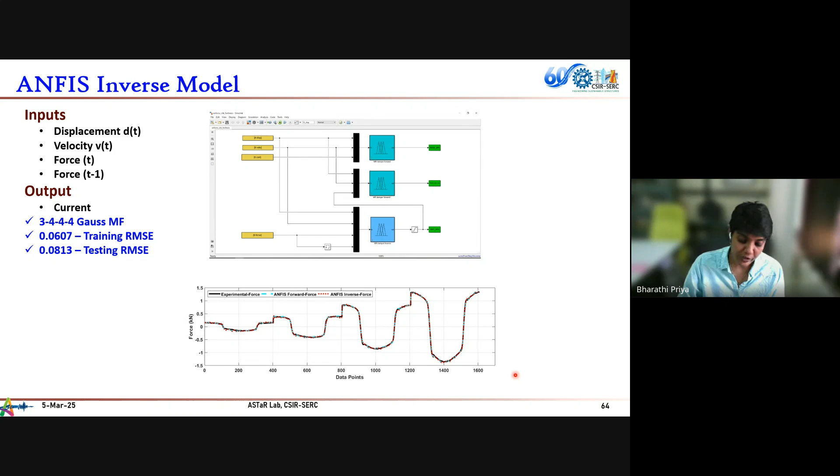So if you have the force displacement, force velocity relationship, we found that the ANFIS model is better at capturing both relationships to a greater extent. One big advantage of this ANFIS model is inverse modeling, which we need for seismic applications. If you have velocity and acceleration, what is the force needed? The reverse can also be utilized - if you need a force and know the distance, what current should you give to achieve that force. This is the inverse principle, which can be done easily using these data-driven models.

When modeling this, we found something very interesting, particularly relevant for research scholars. We found that the liquid is yielding, and because of that, energy is dissipating. The energy has to get converted from one form to another. We found that it gets heated up when the fluid is shearing. When the damper is operating, we observed a lot of heat being generated. So we thought, if there is heat, and our liquid is responsive to heat, does it affect the energy dissipation capacity? That was a doubt for us.

So we introduced another parameter, the operating temperature. This is not the environmental temperature - there are a lot of studies done on that, such as using a damper in Chennai at 40 degrees versus using the same damper in minus temperatures like Ladakh. That is operating temperature in the environmental sense. But what I am talking about here is the operating temperature due to the operation of the damper itself.

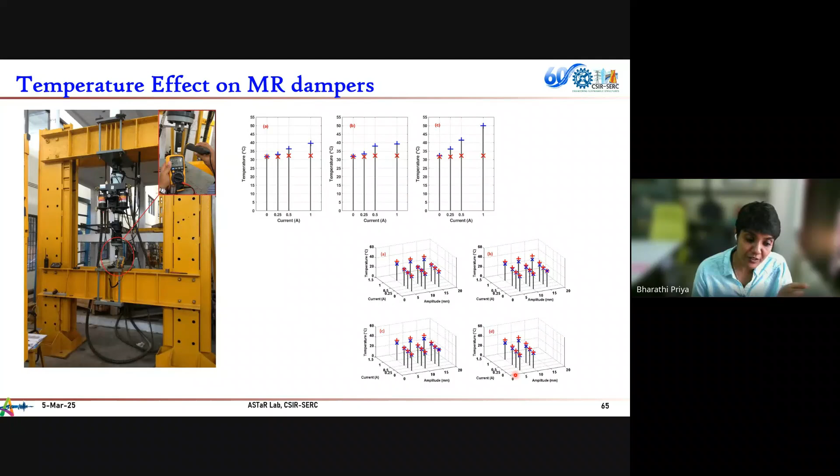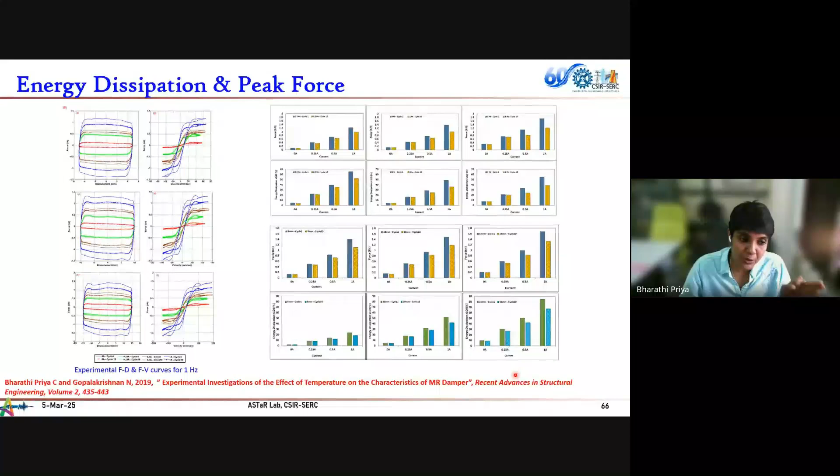When the damper starts operating for some n number of cycles, it dissipates energy as heat. We studied whether that heat affects the energy dissipation capacity, and we found that yes, between the first cycle and say the 10th or 11th cycle of operation, the energy dissipation is actually reducing. It's more prominent when the current is increasing - if you want more damping and give more current to the damper, it heats up, and because of that, it actually reduces the energy dissipation capacity. This was an important finding - it's not just three parameters that control the damper; we also have to account for the heat generated from the damper.

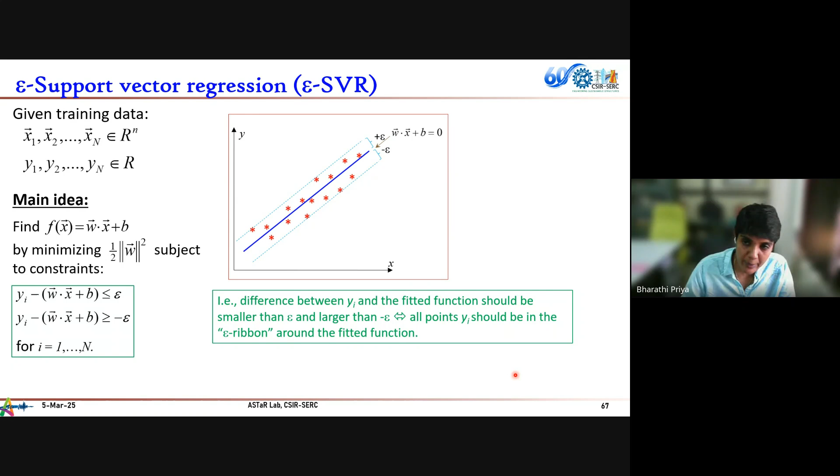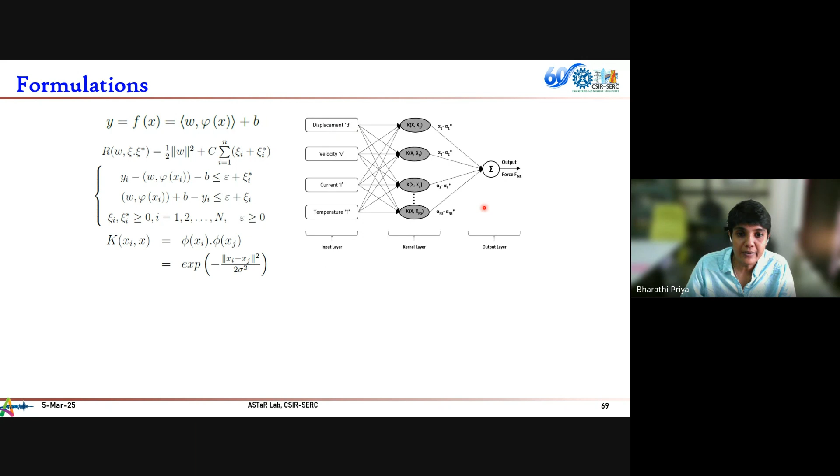So we wanted to make our model adaptive for that parameter as well, using a support vector regression model - another data-based model. I won't go into the details of how SVR is modeled. Basically, we introduced another input parameter, temperature, along with displacement, velocity, and current, which were already the input parameters determining the force generated. We took these four input parameters to form the input layer, and the nonlinear characteristics are modeled using the kernel layer, which gives the output force for our damper.

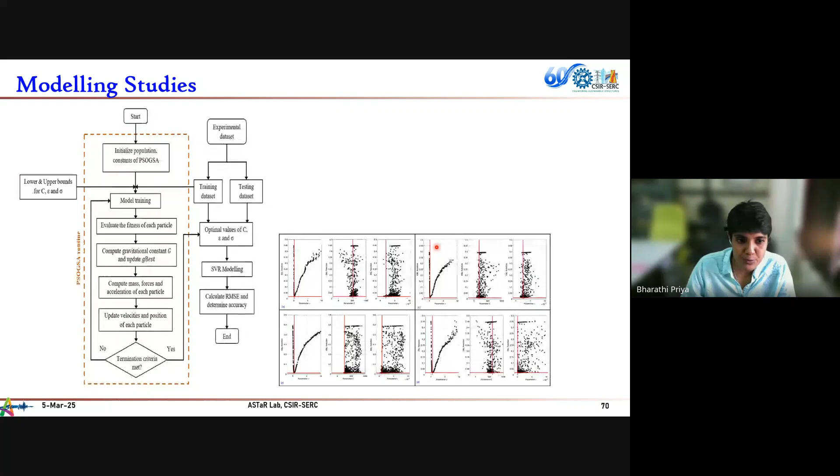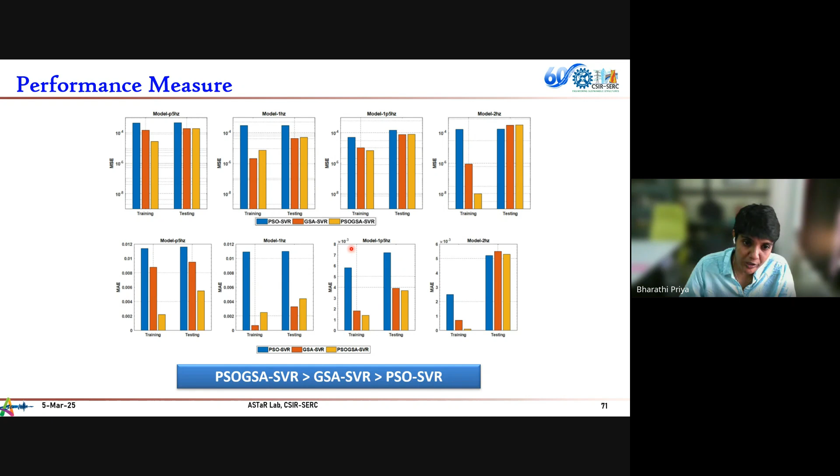There are various parameters for this, and how they're optimized with different optimization techniques is what I'm showing here. This isn't of much interest for practicing engineers, but for research scholars, you can find out which model will be better suited for modeling your technique. We found that one of the meta-heuristic models is actually better and computationally more effective in calculating force displacement and force velocity.

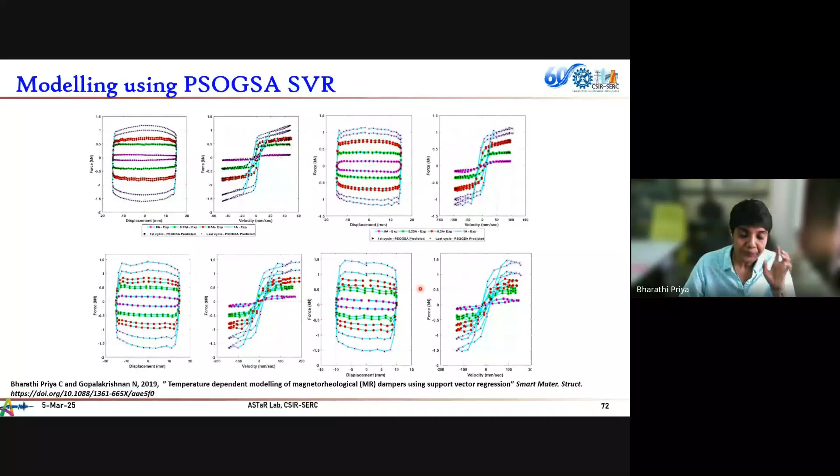So this is the first part of it. When you have a damper, you need to find out the parameters that affect it, and then figure out how to model it so you can determine what current should be given to achieve a needed force. Without figuring out this area, we cannot adapt the damper for our application. So this is the first part of the lecture, where I talk about how, if you are choosing one of the smart materials, you are going to utilize it for a structure. The first step is characterization of the damper. Next, we are going to see...